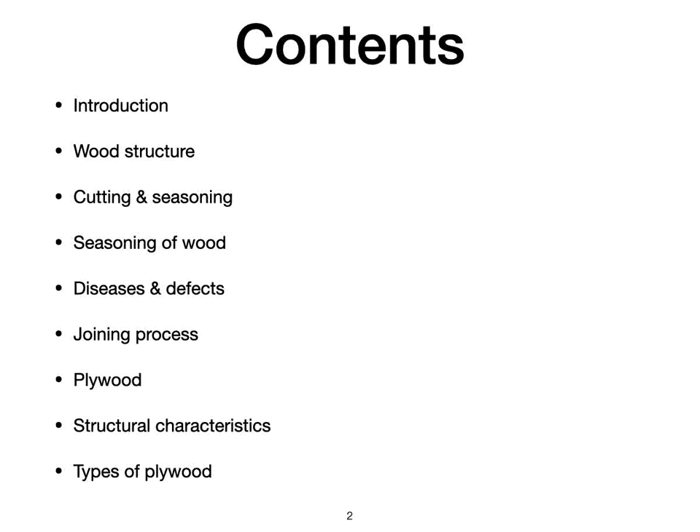From the very beginning of aviation, wood has been used in aircraft construction. Early aircraft designers and builders often used ash and hickory. They were looking for a type of wood that would be relatively lightweight in addition to being very strong. Just prior to World War One, Sitka spruce was discovered by aircraft builders and found to be very well suited to their needs. The strength to weight ratio was discovered to be very favorable for aircraft use. Several other types of wood had similar strength to weight ratios but were not as easily harvested or as plentiful.

At the time, spruce proved to be the best choice, not only because of the physical characteristics, but of equal importance was the fact that spruce was readily available and easy to use as a building material. With these advantages, spruce became very widely accepted as the primary material to be used in building an airplane.

With the advent of World War II, spruce became even more popular. Manufacturers used the material in the construction of a large number of aircraft. Wooden spars were fabricated from spruce in many airplanes along with the ribs and other structural parts. Because of high demand for both aircraft production and for spruce to be used as a major material in manufacturing parts, forests of this popular wood were rapidly depleted.

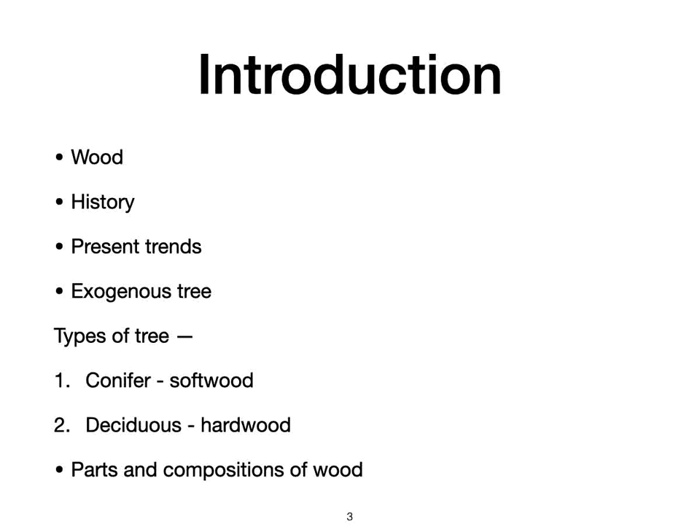The rising of the sap develops the first half layer of a new annual growth ring. At the close of summer, when the sap descends, further growth results. This latter outer portion of the annual ring, termed autumn wood, is readily distinguishable from spring wood as it is somewhat darker in color. If a fully developed tree is sectioned, examination will reveal three obviously different types of growth.

These comprise the core or pith, the annual rings, and the bark. The pith is the soft center of the trunk and is the oldest part of the tree. Annual rings represent the principal portion of the tree. The bark is the outer covering of the tree and is composed of two layers, separated from the outer annual ring by the cambium, a skin-like tissue which is pale yellow or cream in color.

The inner part of the woody layers, or annual rings, is known as heartwood. In a healthy tree, it is dark in color. The outer part of the woody layer is ripe and is termed sapwood. It is porous and full of sap. This moisture causes it to be lighter in color than heartwood.

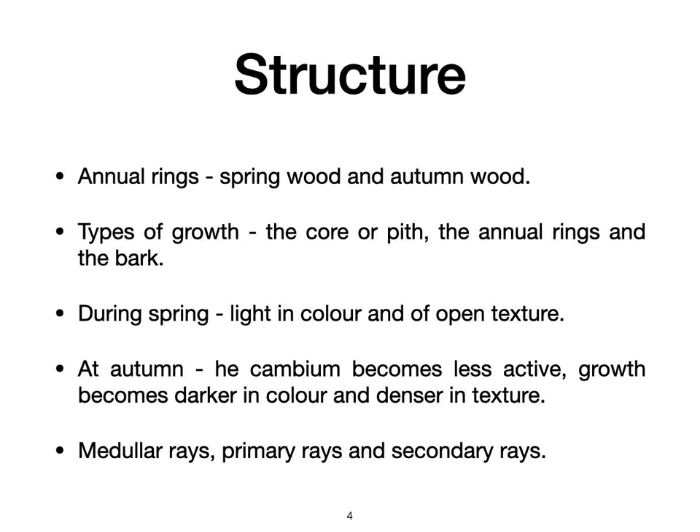Next, the next stage is to consider the cutting and seasoning of wood. Trees are normally felled at a period when the sap is at rest. Any other time results in the timber containing an excess of sap, which is difficult to dry out without adversely affecting the durability of the wood.

To obtain the best results, a tree should be felled when mature. Immature trees and old trees produce inferior quality wood which is neither strong nor durable. A felled tree is termed a log, from which may be obtained timber in various usage sizes. The process of cutting up a log is known as conversion.

There are 6 standard terms of reference for timber that has been converted, which are used to define certain sizes. They are: plank, 2-inch to 4-inch thick and 11-inch and over in width; deal, 2-inch to 4-inch thick by 9-inch to 10-inch in width; and batten, 2-inch to 4-inch thick by 5 to 8-inch in width.

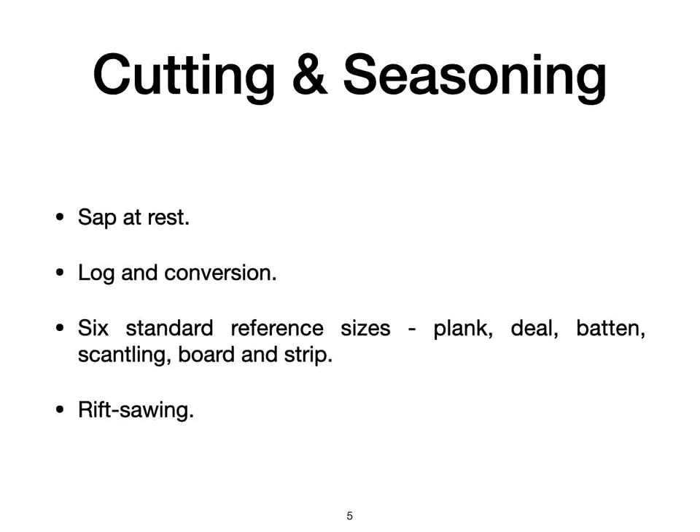Seasoning of wood. The drying out process is termed as seasoning. When seasoned, timber becomes harder, stiffer, and has an increased resistance to decay. The presence of sap invites decay and disease. Furthermore, seasoned timber is still less likely to warp or shrink in service.

If all the moisture present in wood is removed, the timber will become excessively hard and brittle. Therefore, it is important to allow a percentage of moisture to remain in the wood to keep it supple and to a certain extent resilient. The amount of seasoning is measured by the quantity of moisture left in the wood afterwards and is expressed as percentage moisture content of the timber if it were to be thoroughly dried out. The optimum moisture content of aircraft timber is about 15%.

Timber may be seasoned in several ways. One method is to stack the timber under cover in the open to allow free passage of air through the pile. This method produces well seasoned wood, but depending on the size of the timber and whether it is hardwood or softwood, it takes from 1 year to 10 years to complete.

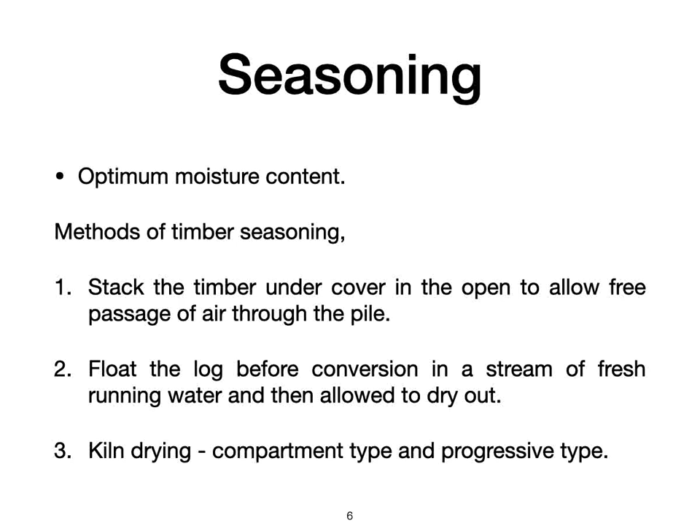Diseases and defects. As with all living things, trees are subject to natural diseases and defects during growth, which can have very serious effect on the strength of resulting timber. Also, converted timber can develop disease which render it useless.

Diseases of timber are caused by the action of fungi. A fungus is a life form of vegetation which can only live by feeding on organic substances. It contains minute thread-like cells which penetrate the wood and absorb substances of cellular tissue as food. This process breaks up the whole structure of timber and can be identified by obvious mold on the surface, a fine cobweb-like mold, discoloration in patches, and in advanced stages, the rendering of timber into a useless, spongy mass.

Dry rot, which cannot occur in living wood but attacks wood exposed to warm, moist conditions combined with poor ventilation. Sapwood and unseasoned timber are especially susceptible to this. The disease spreads very rapidly and is detected by the fungus growth which develops on the surface. Ultimately, the wood is reduced to a powder.

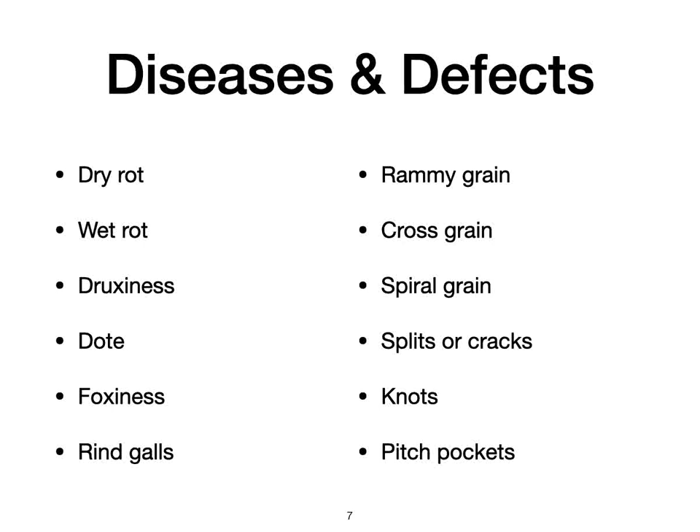Some of the woods used in aircraft construction.

There are four woods which are regularly used in aircraft construction. They are Sitka spruce, birch, ash, and Douglas fir. In addition, mahogany, balsa, pine, and gaboon fulfill certain duties.

Sitka spruce is a softwood which grows in Canada and the United States of America. It is brownish yellow in color, straight grained, and satiny in appearance. Its qualities regarding resistance to splitting, bending, and stiffness are very good in relation to its weight. Due to this favorable strength to weight ratio, it is used extensively in aircraft construction for spars, longerons, and many more. Birch.

It is a hardwood and grows in most parts of Europe. It is yellowish white or brownish white, strong, and does not split easily. It is sometimes used in place of ash for laminated members such as wingtip posts, in addition to being used for bearing blocks. Its principal use in aircraft, however, is for the manufacture of plywood.

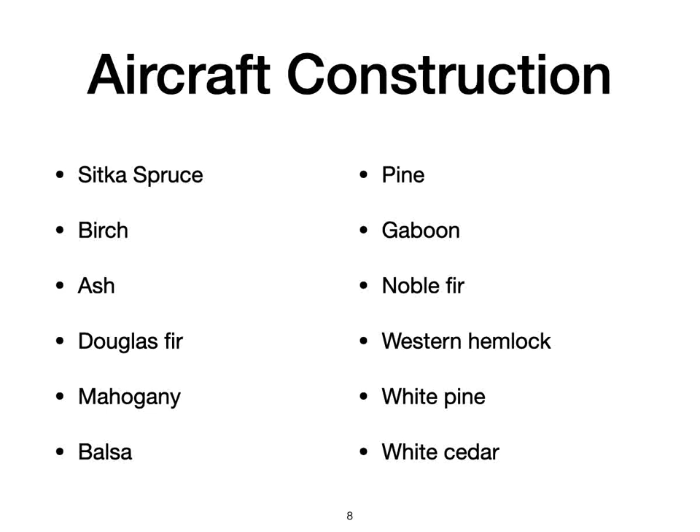Aircraft joining process for wood. Joints are methods of cutting wood to increase the strength of joints. All joints are generally fixed with wood adhesives. In the joining process, there are many different types of joints.

First, the basic butt joint. Second, the mitered butt joint, half lap joint, tongue and groove joint, mortise and tenon joint, biscuit joint, pocket joint, dado joint, rabbet joint, through dovetail joint, half blind dovetail joint, sliding dovetail joint, and box joint.

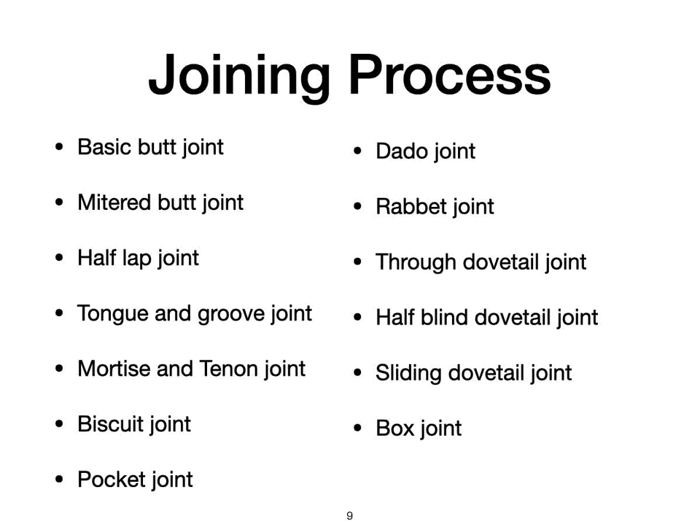First, the basic butt joint. There is no more basic wood joinery than the butt joint. A butt joint is nothing more than when one piece of wood butts into another, most often at a right angle or square to the other board, and is fastened using mechanical fasteners. This type of joint is often used in wall framing on construction sites.

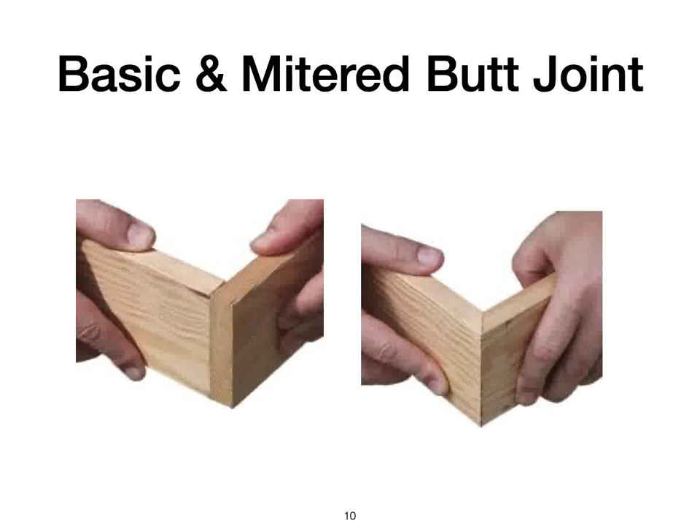Second, the mitered butt joint. A mitered butt joint is nearly the same as a basic butt joint, except that two boards are joined at an angle instead of square to one another. The advantage is that the mitered butt joint will not show any end grain and as such is a bit more aesthetically pleasing. However, the mitered butt joint isn't all that strong.

Half lap joint. A half lap joint is where half of each of the two boards being joined is removed so that the two boards join together flush with one another. This type of wood joinery can obviously weaken the strength of the two adjoining boards, but it is also a stronger joint than a butt joint. There are a number of projects where this type of wood joint is quite desirable in spite of its drawbacks.

Tongue and groove joint. When joining two boards square to one another along a long edge, one can simply butt the joint together and hold it with fasteners. However, the tongue and groove joint is much stronger and provides more adjoining surface area, which is particularly useful if you're going to glue the joint.

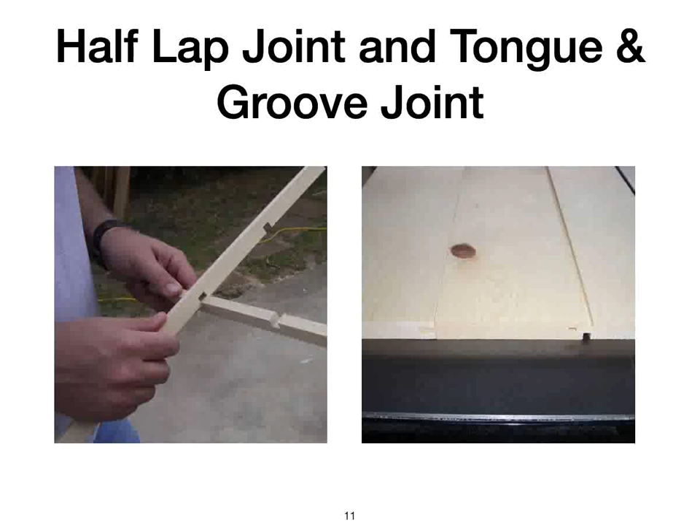Mortise and tenon joint. The mortise and tenon is a classic wood joinery method. These joints have been used since the early times of woodworking and are still among the strongest and most elegant methods of joining wood.

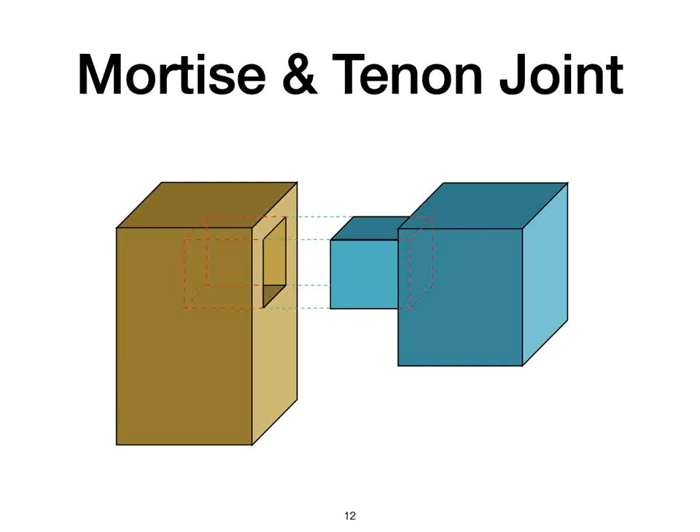Biscuit joint. Another method of joining boards along the edges, like the tongue and groove joint, is to cut slots and use beechwood wafers known as biscuits to hold the boards in place. This is a very useful modern woodworking joint, particularly for creating tabletops, relying on glue and the swelling of the beechwood biscuit to hold the boards in place.

Pocket joint. The pocket joint is a type of wood joinery that involves cutting a slot and pre-drilling a pilot hole at an angle between two boards before connecting the two with a screw. This drilling needs to be very accurate, so it is typically accomplished by use of a commercial jig. Pocket joints work greatly for cabinet face frames and other similar applications where a lot of strength is not needed.

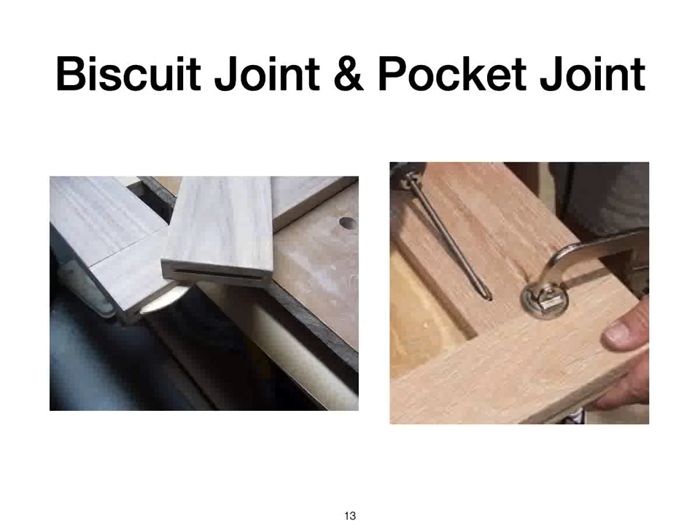Dado joints. A dado is nothing more than a square grooved slot on one board where another board will fit. Similar to tongue and groove joinery, this is a commonly used wood joint for connecting plywood, such as building cabinetry.

Rabbet joint. Another common wood joint used in cabinetry is the rabbet joint. A rabbet is essentially a dado cut along the edge of a board. Rabbets are often used at the back of cabinets and other similar assemblies for attaching the back to the sides of the box, adding a considerable amount of strength to the assembly.

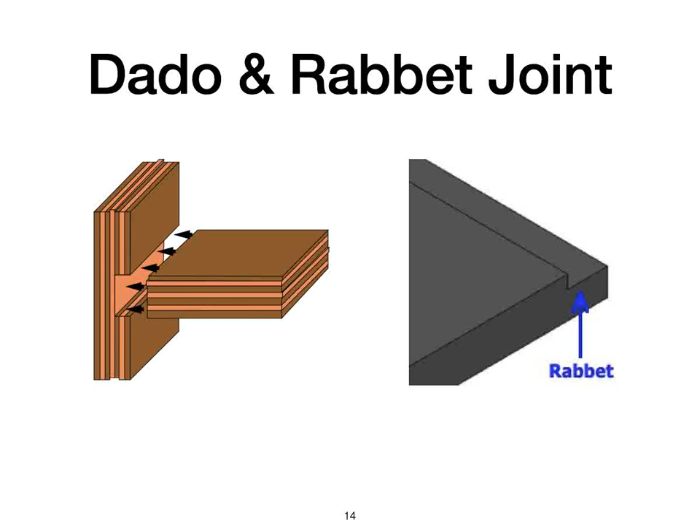Through dovetail joint. Of all wood joinery methods, the through dovetail may be the most revered. A classic through dovetail is beautiful and very strong and adds a touch of class to any piece. There are a few methods for creating through dovetails, from hand cutting to machining with a jig.

Half blind dovetail joint. There are situations where a dovetail joint is the connection of choice, but both edges of the dovetail should not be visible. A perfect example is a drawer front where you don't want to see the ends of the through dovetail on the face of the drawer. For this type of joint, the best choice is a half blind dovetail.

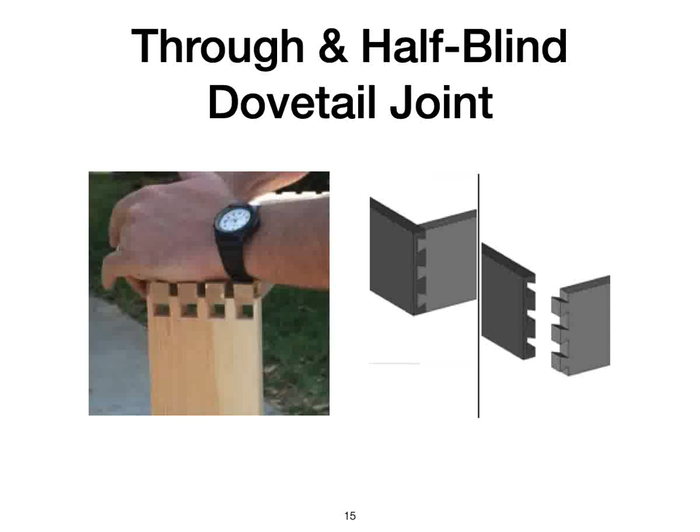Sliding dovetail joint is a versatile joint with a lot of possible uses. A good way to think of it is as a locking dado.

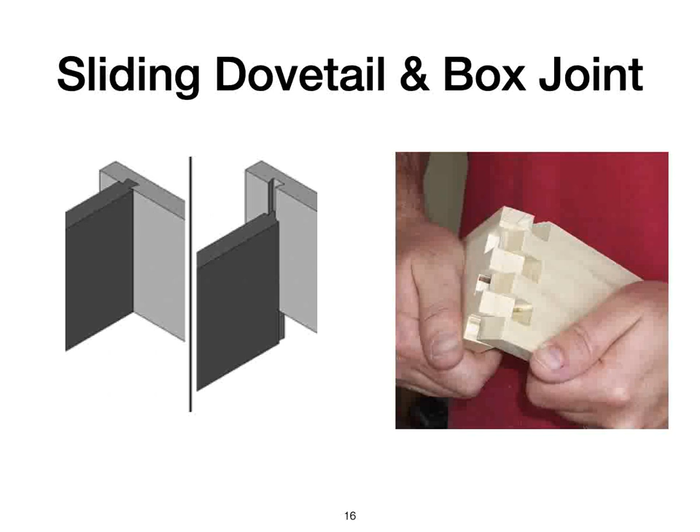Box joint. Dovetail joints are beautiful and strong but not always practical. A box joint is a simpler alternative to the dovetail joint.

Next is plywood. Plywood is a manufactured wood panel made from thin sheets of wood veneer.

Plywood layers, also called veneer or plies, are glued together with adjacent plies having their wood grain rotated relative to adjacent layers up to 90 degrees. All plywoods bind resin and wood fiber sheets to form a composite material. This alternation of grain is called cross graining and has several important benefits: it reduces the tendency of wood to split when nailed at the edges, it reduces expansion and shrinkage providing improved dimensional stability, and it makes the strength of the panel consistent across all directions.

There is usually an odd number of plies so that the sheet is balanced. This reduces warping. Because plywood is bonded with grains running against one another and with an odd number of composite parts, it is very hard to bend it perpendicular to the grain direction of the surface ply.

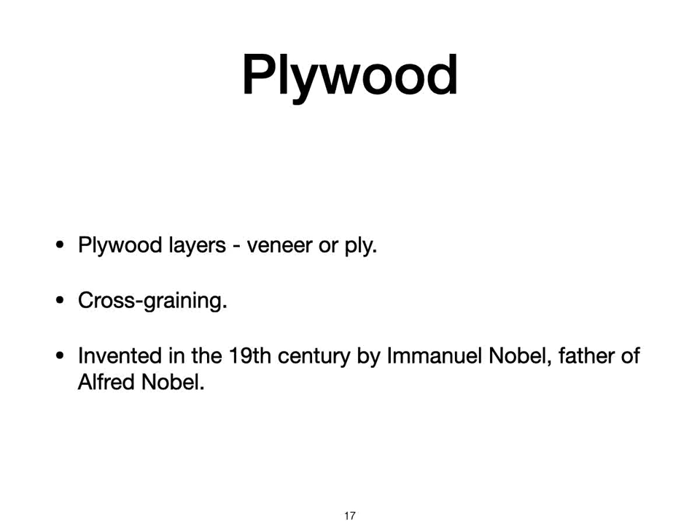Structural characteristics. A typical plywood panel has face veneers of a higher grade than the core veneer. The principal function of core layers is to increase the separation between outer layers where the bending stresses are highest, thus increasing the panel's resistance to bending. As a result, thicker panels can span greater distances under the same loads.

In bending, maximum stress occurs in the outermost layer, one in tension, the other in compression. Bending stress decreases from the maximum at the face layers to nearly zero at the central layer. Shear stress, by contrast, is higher in the center of the panel and zero at the outer fibers.

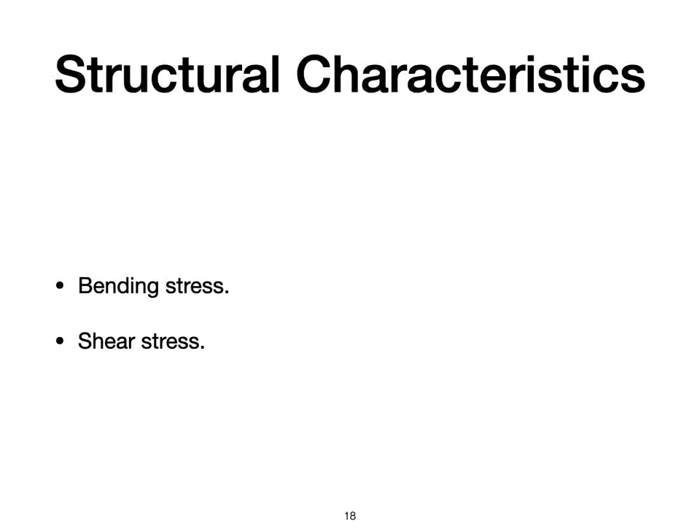Different varieties of plywood exist for different applications. Softwood plywood is usually made either of cedar, Douglas fir, or spruce, pine, and fir, collectively known as spruce pine fir or SPF plywood, or redwood, and is typically used for construction and industrial purposes. Plywood for flooring applications is often tongue and groove. This prevents one board from moving up or down relative to its neighbor, providing a solid feeling floor when the joints do not lie over joists.

Hardwood plywood is made out of wood from deciduous trees like oak, beech, and mahogany, and used for demanding end uses. Hardwood plywood is characterized by its excellent strength, stiffness, and resilience to creep. It has a high planar shear strength and impact resistance, which makes it especially suitable for heavy duty floor and wall structures. Oriented plywood construction has a high load carrying capacity. Hardwood plywood has excellent surface hardness and damage and wear resistance.

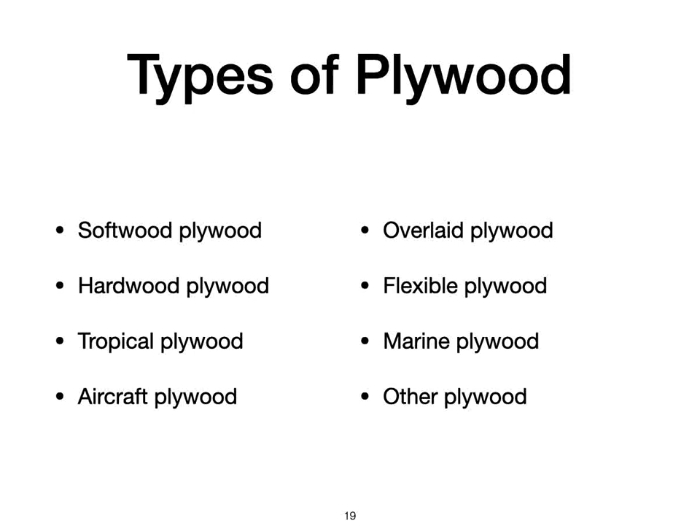And this is the end of the session on aircraft wood and plywood.